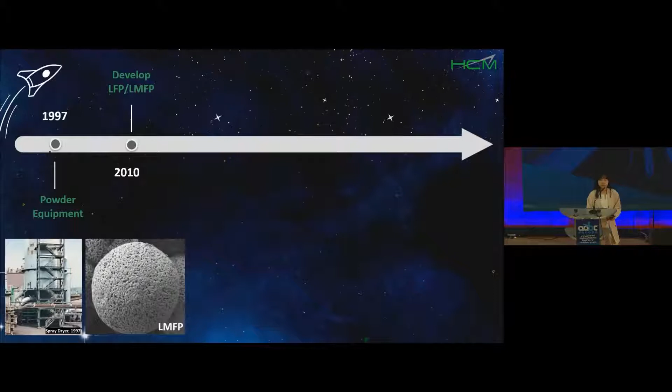Unlike other material makers, our company actually started from powder equipment, such as the spray dryer and also the sand mill. With the equipment background, we started to develop both LFP and LMFP in 2010. However, at that time, we noticed the market of LFP was so mature that at least hundreds of companies were working on that. Conversely, seeing the potential of LMFP, we decided to focus on this material only and successfully turned LMFP into mass production in 2016.

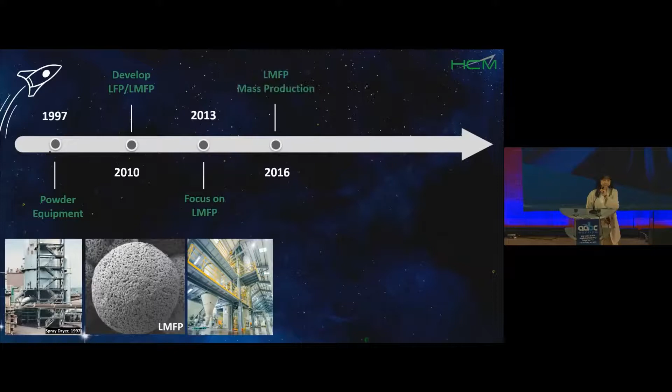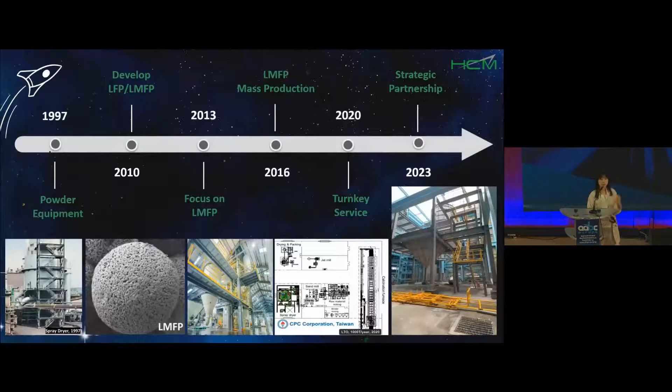We further leverage our strength in equipment and material to offer a turnkey service. This is the case: we work with a government-owned Taiwanese gasoline company. We helped them set up the production line with an annual capacity of 1,000 tons for LTO, the anode material. You can see the clip there, this is the spray dryer being installed at their plant this May. Starting from this year, we will focus on developing strategic partnerships, which will be elaborated in the business strategy part.

This is the roadmap of our LMFP product. We've been optimizing this material since 13 years ago. Right now Gen 1 and Gen 2 are already discontinued, and Gen 3 is most widely adopted by our partners. In order to optimize the processability of our material, our team is developing the so-called Gen 4. In the future, we will focus on tailor-made LMFP, where we can customize the particle size or the manganese to iron ratio for partners.

Here's the half-cell testing data of our material. Our material has a specific capacity of 150 mAh per gram, and the power capability is very superior. The specific surface area is about 12 square meters per gram, and the maximum press density is 2.3 grams per cc. The carbon loading is very low, so you can fully utilize the capacity of the material.

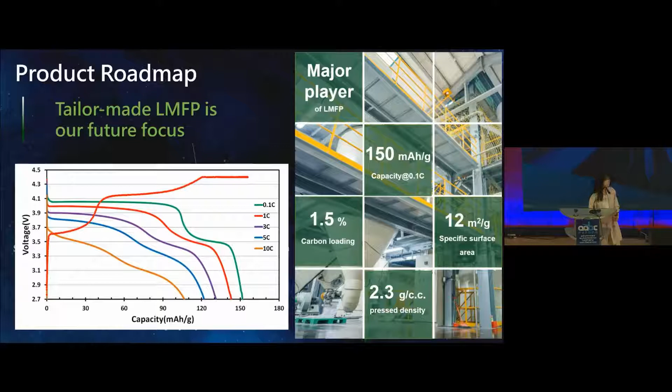We have successfully developed the power type LMFP cell. It shows high rate discharge capability at 12C and exceptional cycle life over 5,000 cycles. Besides that, by blending soft carbon and graphite, the cell can be charged at a high rate, 3C charge and discharge, and retained about 85% of the capacity after 4,000 cycles.

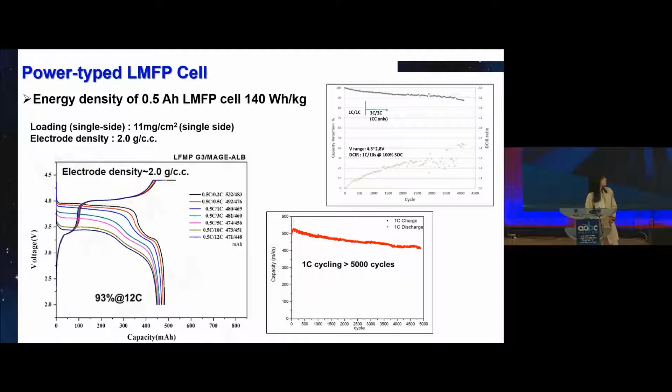We also successfully developed the so-called energy type LMFP cell with a single side electrode loading of 4.5 mAh per square centimeter. With this loading, the thickness of the electrode was about 240 micron before calendaring, and the electrode density was about 2.2 grams per cc. The cell has an energy density of about 185 watt-hours per kilogram.

The cell retained about 75% of the capacity after 5,000 cycles at 0.5C charge and 1C discharge at room temperature, and about 72% of the capacity after 818 cycles at 45 degrees C. However, after 5,000 cycles, we noticed the discharge curve of the cell revealed the disappearance of the iron plateau.

To investigate the capacity fading mechanism, we disassembled the cell and took out the positive and negative electrodes to conduct the so-called half cell formation. During the process, we observed the appearance of the iron plateau, and the capacity of the material returned to over 95%. This indicated that the disappearance of the iron plateau was due to lithium depletion. This means that in the future, we may recycle LMFP by replenishing lithium to the material.

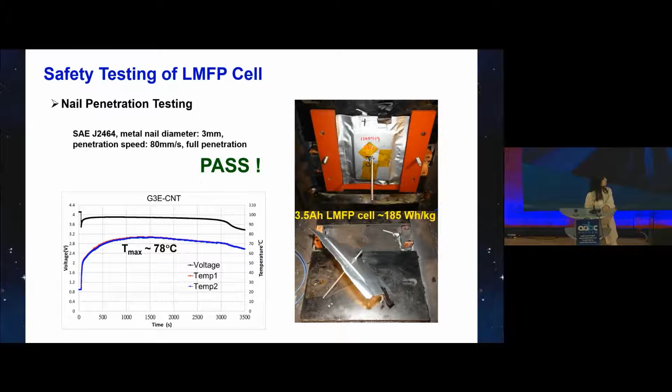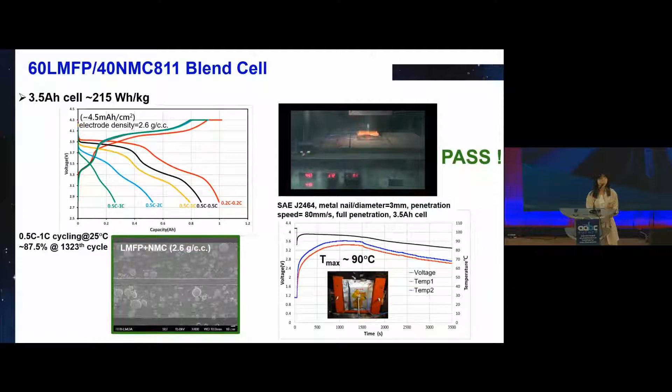We also have the 60% LMFP with 40% NMC811 composite cell, which achieves an energy density of about 215 watt-hours per kilogram. This cell also passed the nail penetration test with a maximum temperature of 90 degrees C.

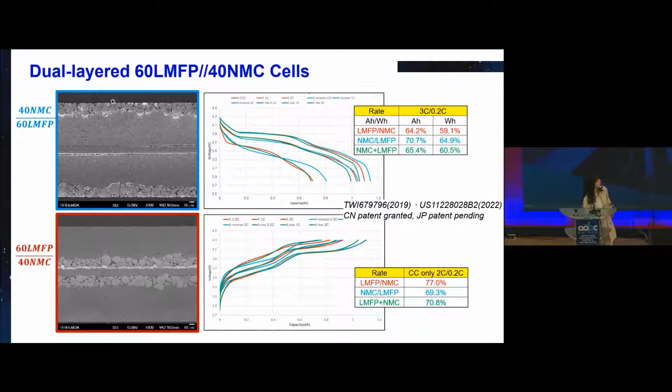Let's turn our attention to the impact of electrode structure on the electrochemical performance of the cell. In addition to studying the composite cell, we also examined dual layer cells with either NMC or LMFP in the top layer, as shown here. The dual layer cell with NMC in the top layer, marked in blue, had the best discharge power capability. Conversely, the dual layer cell with LMFP in the top layer had the best charge power capability.

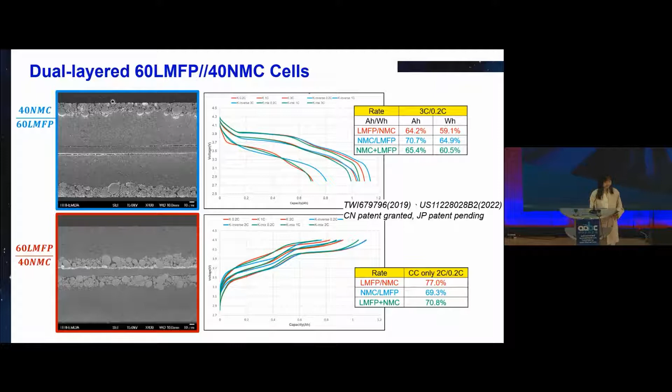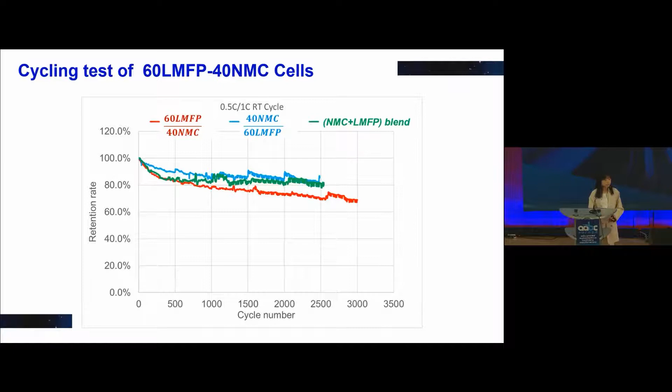Among these cells, we also observed that the dual layer cell with NMC in the top layer, the blue part, had the best cycle life performance. In line with the aforementioned LMFP-rich composite cell, we noticed a similar trend in the NMC-rich composite cell, with 70% NMC and 30% LMFP. Among these cells, the dual layer cell with LMFP in the bottom layer had the best charge and discharge power capability, surpassing the composite cell and the cell with LMFP in the top layer.

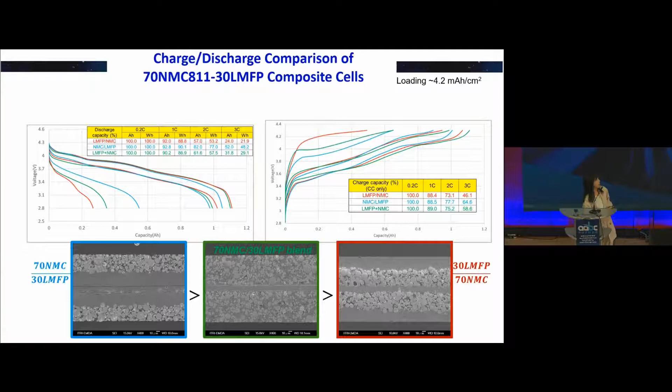And we also successfully developed the 80% NMC with 20% LMFP composite cell, which achieves an energy density of 225 watt-hours per kilogram. However, when using a regular PP or PE separator without ceramic coating, we noticed that the cell did not meet the safety requirement. So we were thinking if there's another alternative measure to enhance the safety of the cell.

So we were thinking to use a ceramic coated separator. So with that, actually, the NMC composite cells with 30% LMFP and 50% LMFP all passed the safety test by using the ceramic coated separator.

So we also have the 4 amp-hour dual layer lithium metal cell with LMFP in the top layer. The cell achieved an energy density of 352 watt-hours per kilogram and retained about 80% of capacity after 400 cycles. The cell charged to 4.1 volts actually passed the safety test and also the overcharge test up to 19 volts. So this is the content for our LMFP material and also the cell.

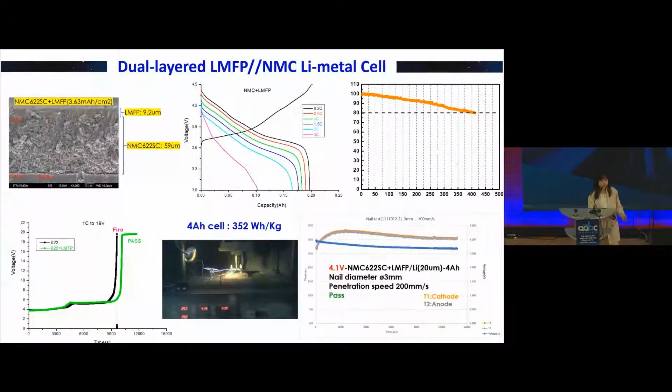So I'll move on to the next part. In order to fabricate high quality LMFP, equipment actually plays a very important role. Most of the equipment here is actually designed and integrated by our team. This time I will just focus on the spray dryer, furnace, and smart manufacturing center.

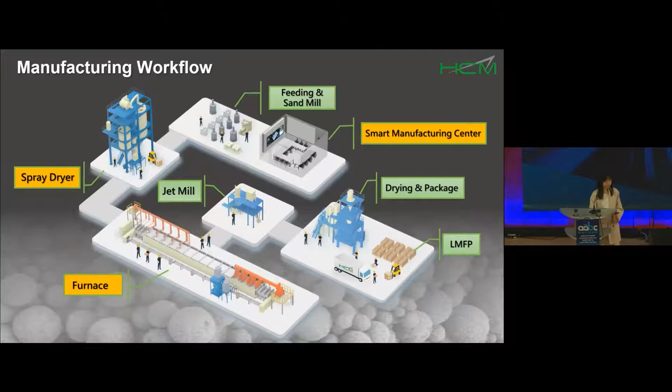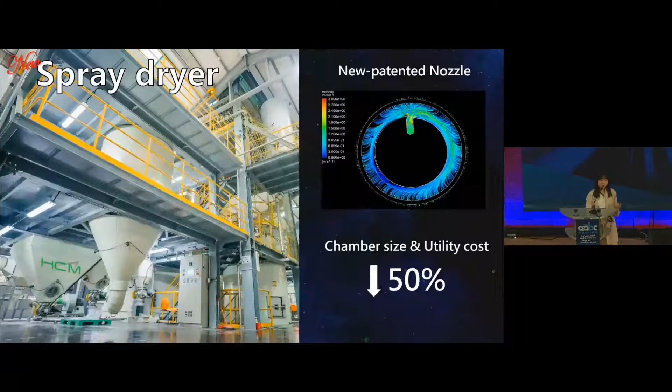During the spray drying process, our goal is to produce ultra-fine powder to give the material better performance. So our team developed a new type of nozzle that can easily achieve this goal. And with the unique flow design, it can help reduce the chamber size and the utility cost by 50%.

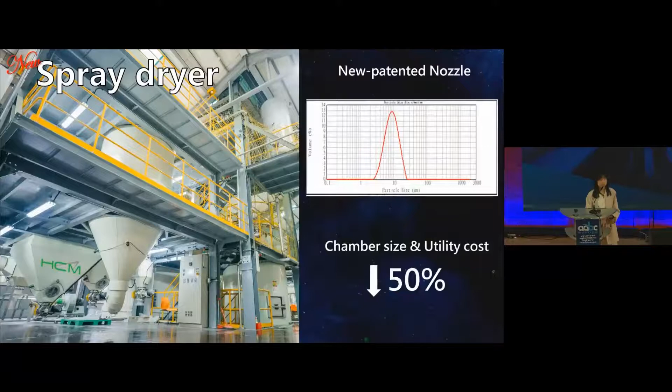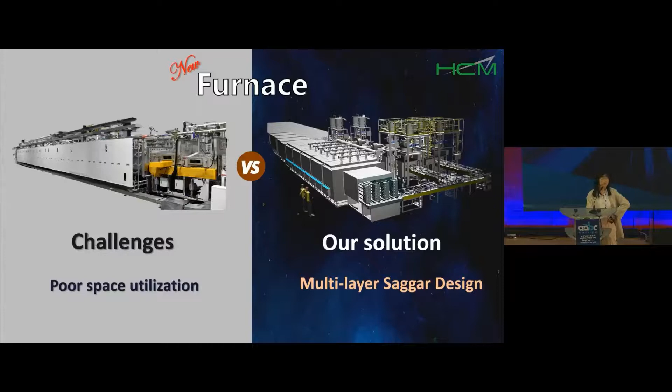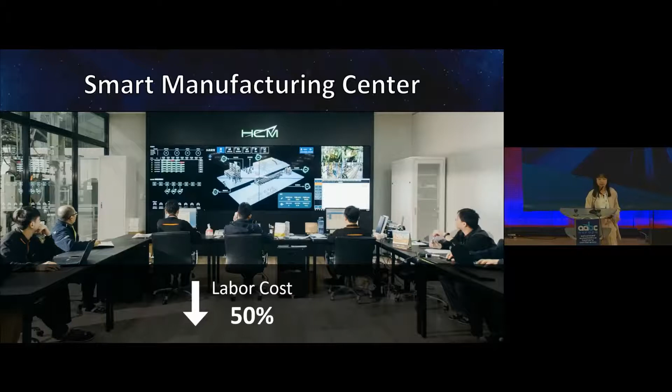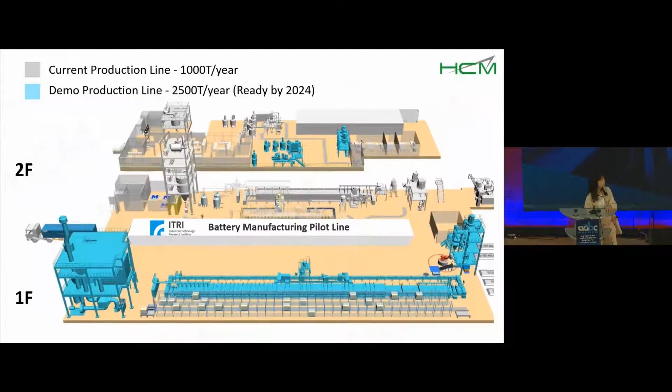Right now we work with Tier 1 makers to apply our material in different applications, including EV, ESS, and eVTOL. And you can see that most of them are in the US, Europe, and also Japan.

So I would like to talk about my ideas about the business strategy. As you know, we are an LMFP maker, so it is no problem for our company to supply the material to your country from Taiwan.

Second, our equipment can be used to produce not only LMFP, but also various materials, including LTO. For partners who already have the material technology, we can supply tailor-made equipment for their production. And if they are looking to scale up the production line, we can help them with turnkey service and equipment integration.

And third, as you know, many companies are trying to integrate the supply chain and produce the material locally. However, many of our partners are cell makers or car makers, so they do not have much experience in material production. So we can use our strength in material and equipment to collaborate with them.